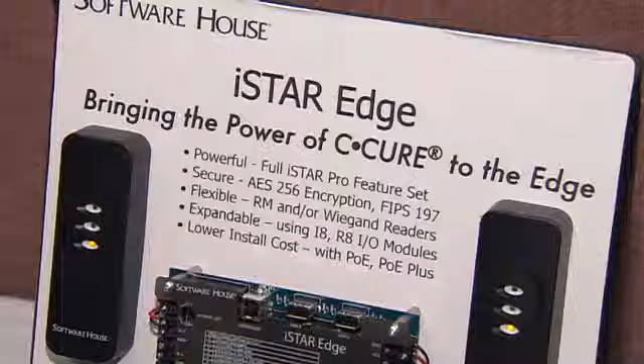We have two access control systems here, again running one driver on the PSIM application. We have a software house system, access control system from Tyco. We have a UTC access control system, again tying into the PSIM using the same driver on the PSIM host.

The PSIM is then able to take these events that come in from these disparate applications or systems and link them to actions on other systems, so we can start automatically triggering actions on those systems. And that is where the real value to the customer starts happening. I'm sorry, I missed the storage content piece as well.

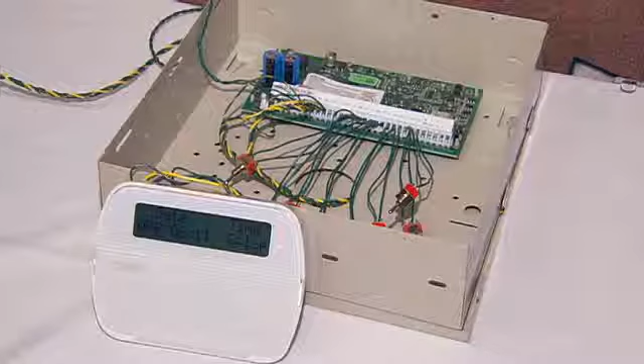We have a HIKVISION recording engine here, an NVR, and that's using the specification for recording and content management to actually have that equipment come in as well. We also have an intrusion system here from DSC. The intrusion system is coming into the PSIM as well.

So we have a lot of different applications going on here, and we'll be able to trigger different events on each one. Nilandra is going to take us through some of the use cases.

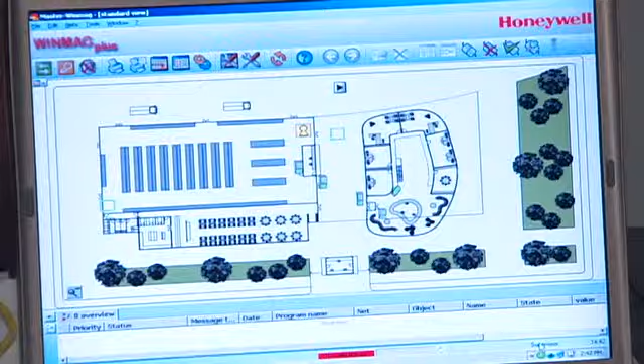Let me switch the inputs here. The application you are now seeing is called WinMag, a Honeywell PSIM application. The challenges with any PSIM application is that you can integrate many products from different manufacturers, but you need to write a custom driver for that.

As Andy said, the advantage with PSIA is there is only one driver. So for the entire demonstration, there is one single PSIA driver which is able to talk to access control and intrusion from different manufacturers. Let me start with some of the user scenarios.

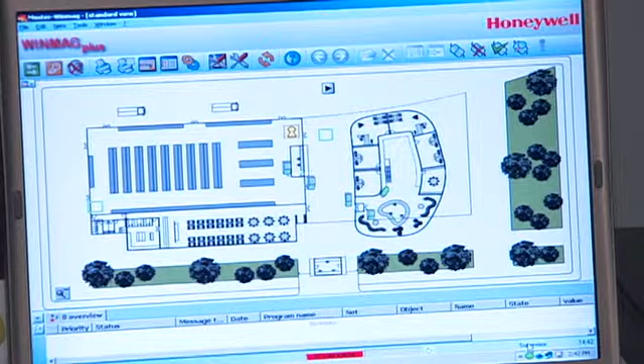The first scenario is that the production plant's intrusion panels are generally kept armed during off-shift hours, and when the shift starts and the first person swipes their card at the access control reader to get entry into the premises, we automatically disarm the intrusion panel.

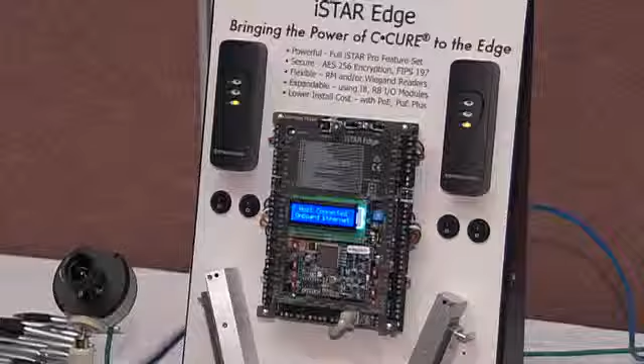So we'll give you a demonstration. You should be able to hear the panel getting disarmed. The panel has got disarmed, the person walks in, and you see the access granted alarm or event right here in this application. I can go into the details and see where the access granted event has happened, at this particular reader. I acknowledge this event and come back.

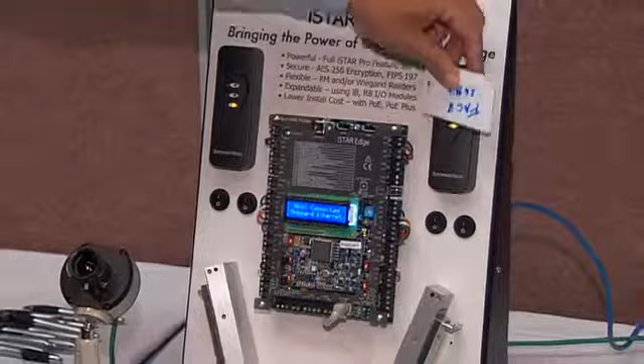Now the shift is coming to a close and people start leaving. When the last person swipes their card at the exit reader, we automatically arm the intrusion system here. We get the access granted at the exit portal and the intrusion panel has got armed.

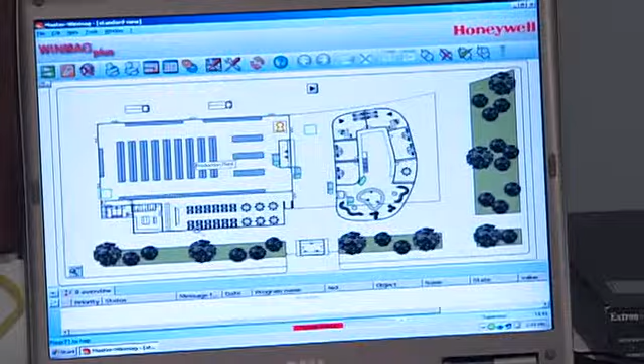Another user scenario is that if somebody tries to get access into this building and the card is not recognized, we get an access denied alarm, and at the same time we start recording using this NVR, which is from HIKVISION, on the HIKVISION camera that's right there. So we get the access denied event here.

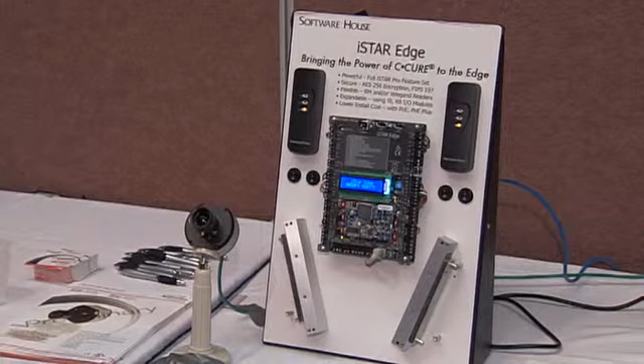I click OK. Now I just want to find out who is it that is trying to gain access into the premises. Oh, not that guy. All right, it's not a bad guy, so I allow the person in.

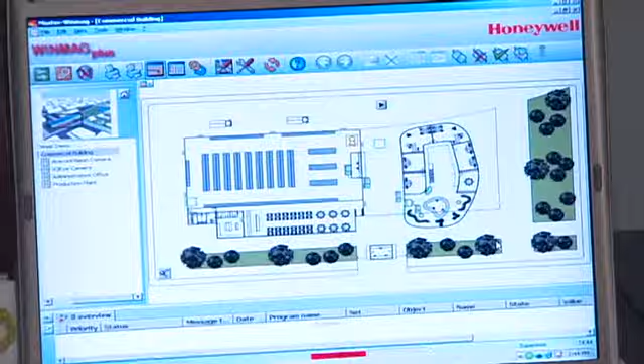So I just come here and say unlatch. And you'll have to see here, lights. Right, so the lights tell me that the door has got unlocked. The person can walk in and I can once again lock the door.

So the door has got locked, and the next user scenario is in the administrative office. When somebody, it need not be as secure as the production plant, so anybody can get in by swiping their card at the entry reader. This is provided by UTC.

And when they want to come out, we want to record a brief video using the HIKVISION camera installed right there on top. This camera is also feeding the Object Video analytics server. So whenever somebody tries to get access to the door, the video analytics tells us that it's time to unlock the door, and it starts recording the camera also.

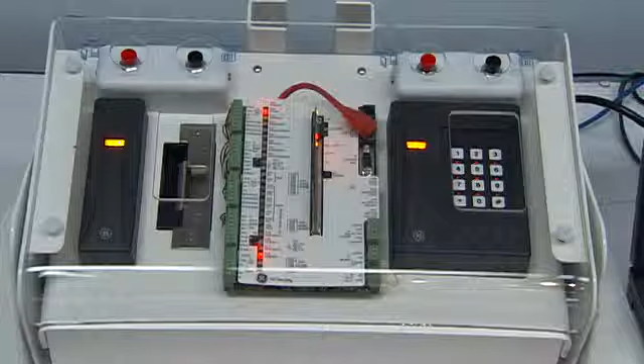So if somebody can please walk there, Andy. We get a person entered area alarm, and you could hear the latch unlock for a brief interval, 5 seconds, and latch again. Can we please do it again so that we can hear the sound?

And it's latched again. Here we have the Honeywell Video Analytics Server, which is doing something similar to what the Object Video Analytics Server is doing. And here we have a camera from IQI, which is again doing something similar to what the HIKVISION camera is doing. Now, to interact with any of these devices, we do not need multiple drivers. With the same driver, we are able to communicate with each of these devices.

Over to Andy. All right, I just wanted to spend a quick moment to discuss some of the specifications available within the PSIA organization. There are two pieces to the specification. We have what we call a systems working group within PSIA, and what the systems group does is look at the overall framework for all the different disciplines to work within.

The systems group has defined specifications for our service model in particular, which defines how we do device discovery and how to handle IP addressing and IP management within an overall system. Another large piece the systems group has provided is the common metadata and event model. This is how we pass messages between each of the different systems, so that we are conforming to a common standard as far as message passing.

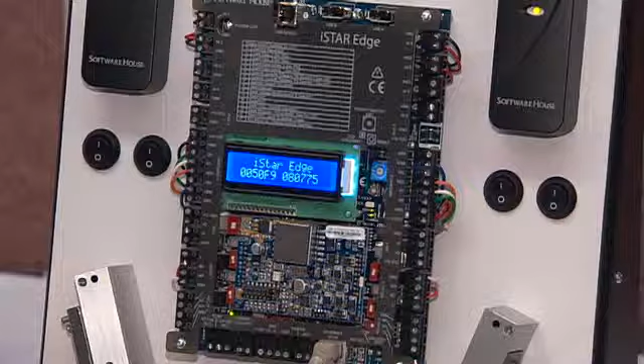Basically, Tyco's part in this demonstration was to implement a PSIA interface to our products, the access control system from Software House and DSC's intrusion panel. We worked fairly closely with Andy from UTC and Alondra from Honeywell to get this done. But we didn't have to work that closely — that was a good point about PSIA.

The standard itself enables people to say, hey, here's what we want to do, and then we can go off and work on it and come up with either a gateway or an interface. Ultimately, a lot of folks might use gateways to talk to their specific devices depending on the manufacturer, or they might actually implement the interface on the device itself. If you have enough horsepower on the device, you might want to do that. And it's flexible enough to work either way.

In our case, what we did was create a PSIA gateway that runs on Windows, and it talks to our PSIM, which knows how to talk proprietarily to these two devices. We were able to do that in a matter of 6 weeks or so, which is pretty good.

So the PSIA gateway is taking — Honeywell's PSIM is wagging the tail in our demonstration. It's taking commands from the Honeywell host and translating them into our proprietary talk to the access control panel or the intrusion panel. As Nalandra explained, we'll go over it one more time: the Honeywell host sees the access control event and turns around and tells our PSIA gateway, hey, arm or disarm the intrusion panel, depending on what it needs to do. So he's wagging the tail, and the two systems are integrated through the Honeywell host, and he didn't have to do anything special to do that.